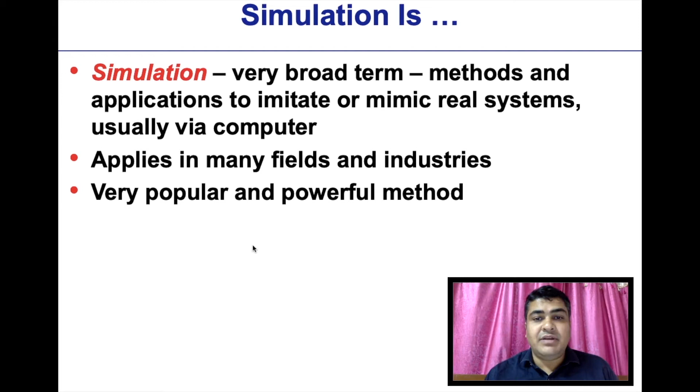So let's go ahead. Simulation - what is simulation? Simulation is basically imitating or mimicking real systems. We see different kinds of systems all around us, and if we want to imitate or mimic them and control them, we need to simulate them in an artificial environment. This is applied in many fields and industries - it's a very popular and powerful method.

What are the different systems we are talking about here? It could be any system - for example, any manufacturing facility, a bank, transportation, medical facilities, computers, freeways, businesses, legal systems, processing plants, restaurants, markets, theme parks, and emergency response systems. These are just some of the systems listed here to give you an idea of how simulations can be applied in practically every field. You name a system, you can identify it, and it can be simulated.

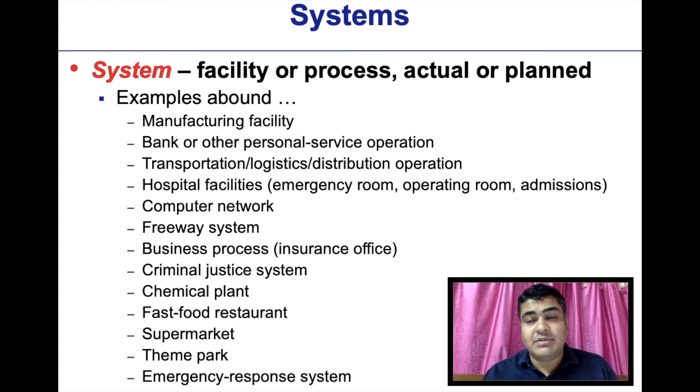So how do we work with the system? Why do we want simulation? Because we want to study the system, measure it, improve it, design new systems based on existing ones, and also control it. Control means we want certain desired set points, desirable outcomes coming from the system, and we want to limit or restrict the undesirable outcomes.

So maybe we are just playing with the actual system, but instead of that, we can have a model or simulation of the system, since often it is impossible to do so in reality with the actual system. It is very difficult to improve and design unless you know exactly what outcome has to come out. For example, if you want to understand how a flooding in a river is going to affect adjoining areas, we cannot wait for an actual flood. We would like to simulate it, understand the system, and then try to take preventive measures.

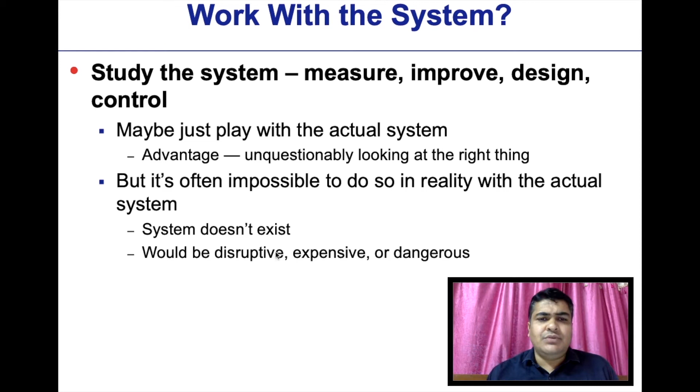So we have to make a model of the system. What is the model? A model is a set of assumptions and approximations about how the real system is working.

So there is a real system, and based on that real system, we can have a model which describes that system. And then we can study the model and manipulate the model instead of the real system, which is naturally easier, faster, and cheaper to do so, and also safer in many cases.

We can also try different ideas with this. As I said, we can manipulate it, and we can make our mistakes on computer where they don't count, instead of doing it in the real world.

Building the model itself is instructive, and we have so much to learn from, regardless of the results many times. And the validity of those models are also checked - how closely this model mimics or corresponds, or is how good this model is a reflection of the actual system.

And that's why if the model is good, then we get almost the same conclusions, in the broad sense at least, as we would get from a real system.

What are the different kinds of models? We can have physical models, like material handling tabletop models that we see in schools and colleges, and then we have mock-ups. We can also have flight simulators, pretty popular.

Then we can have mathematical models which represent the system mathematically, and then they can be controlled for automation, which will come to the point later on. This is often represented by computer programs or mathematical models, and then we can manipulate these programs to try different things and try to get different results.

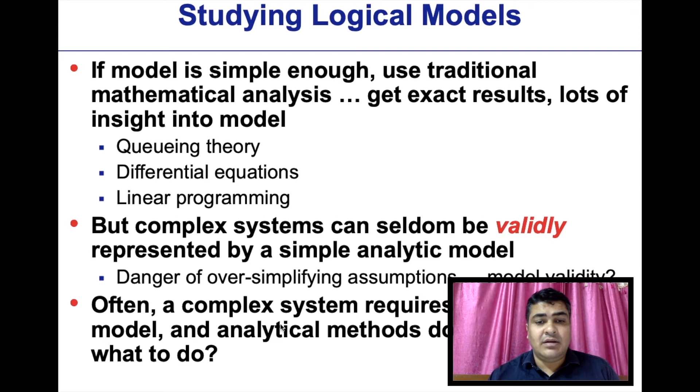So, again, we cannot oversimplify the assumptions to make it simple. It gets simplified to such an extent that it does not represent the actual system anymore. So instead of that, we can have advanced modelings, analytical methods, advanced methods that will reflect the system better.

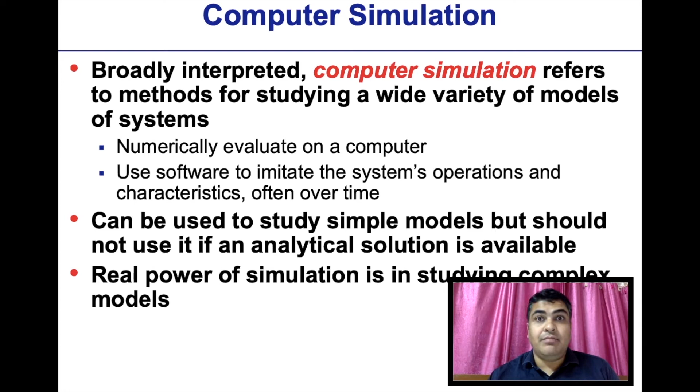So that's why we come to computer-based simulations, for example numerical simulations and softwares which are specifically meant for simulating certain tasks. And then the real power of simulation will be visible when we can study and manipulate complex models for complex systems, which are more realistic.

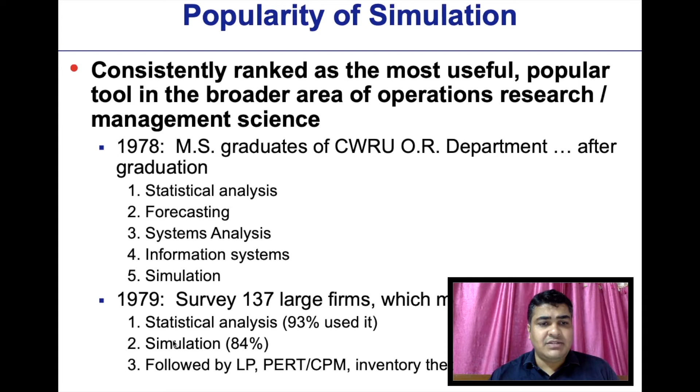Now, this is a brief history of, from 1970s onwards, how simulation became more and more popular. In 1978, in a survey, it was ranked 5, but gradually in 1979, it was ranked 2, and then in 1980, it came up to rank 1 in utility and interest, and then up to '93 all the statistical analysis and the simulation became more and more commonplace, and heavy use of simulation was reported.

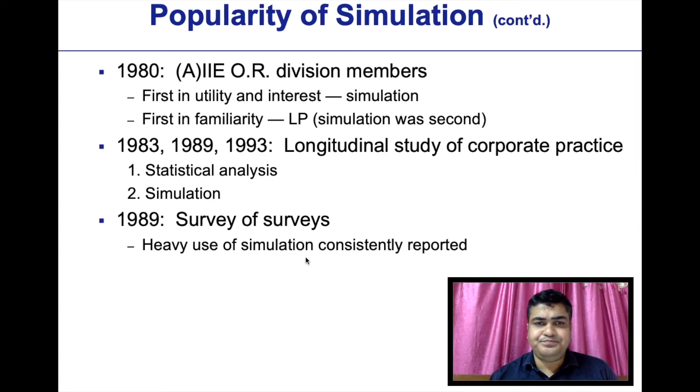A lot of complex systems have uncertainties, a lot of variables, a lot of parameters which are difficult to predict exactly what will happen in different scenarios, and we can't really have a control over the real systems to actually do it. Many times it's not safe also.

But then if we have good models, then we can handle these uncertainties, and we won't have to face this danger of ignoring the system variability. And because of which we'll have better predictions and better response characteristics for different situations.

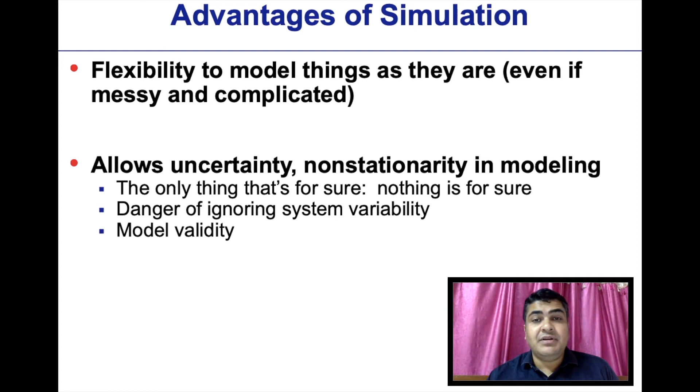For example, in the case of COVID. So the better models they are, the better fitting, the better predictability they have, the better we are suited to handle uncertainties.

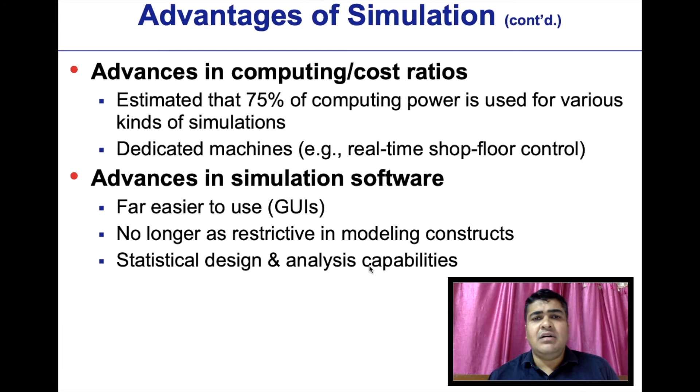Advantages of simulation continued - one more advantage is that gradually over the years the computing power has been increasing as per the cost. So it's estimated that 75% of computing power is used for different types of simulations alone. And then there are dedicated machines and graphical user interfaces which help us have better and better simulations and processing.

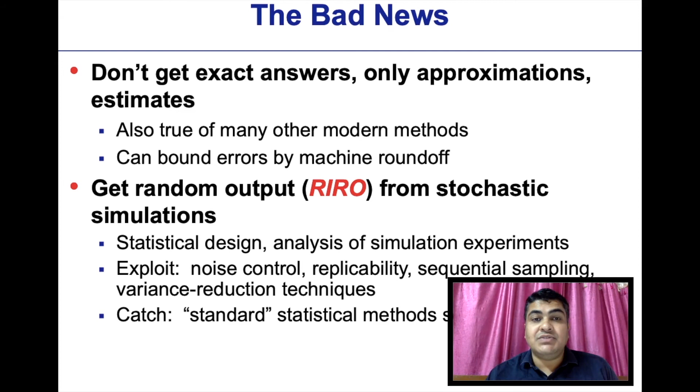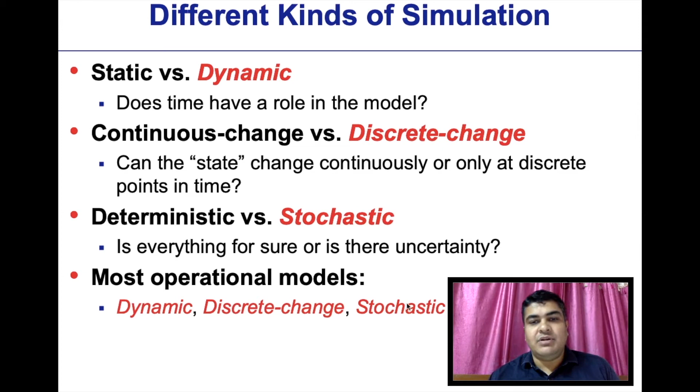Then deterministic versus stochastic, based on uncertainty. Because of uncertainty and rapid change of model system behavior based on time, in a lot of processes these kinds of models, discrete change, stochastic, dynamic, are more preferred.

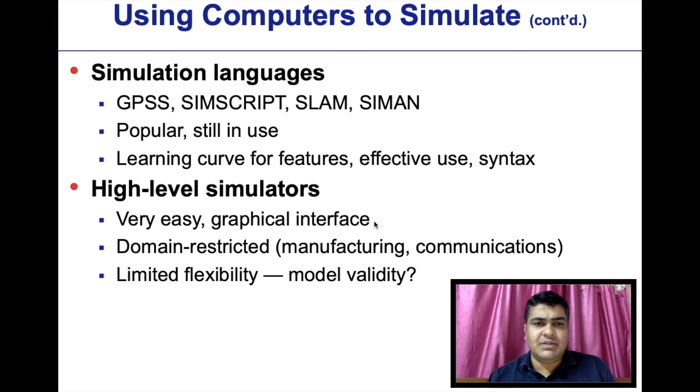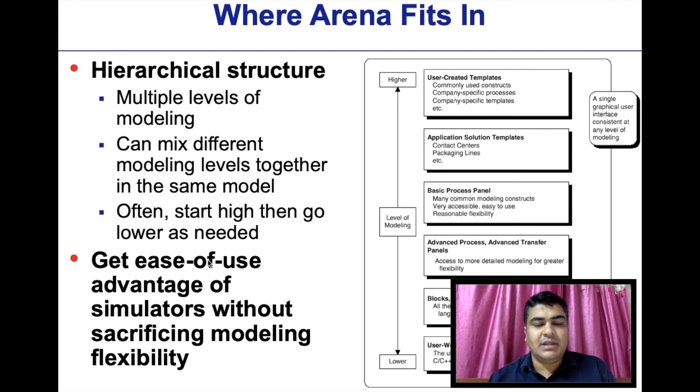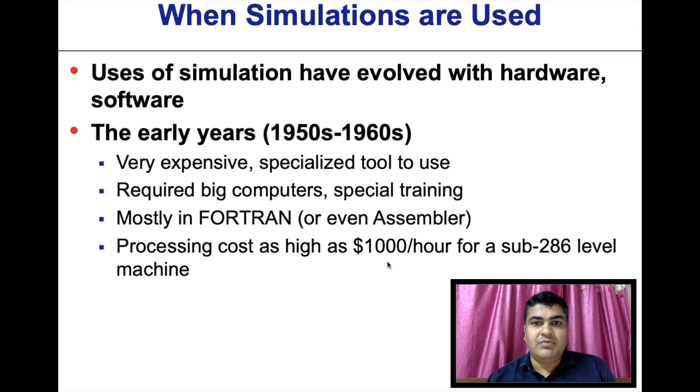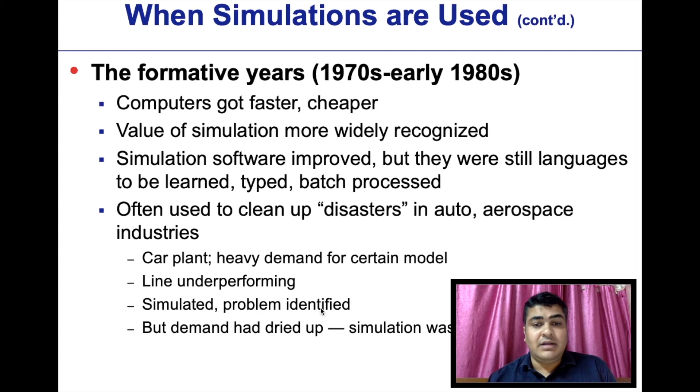In the next decade, it grew even more with better microcomputer power, similar software expanding into GUIs and animation, which became more and more popular. They also cascaded into other areas apart from military and technological, like manufacturing applications, services, healthcare, and other business processes, and different kinds of simulations emerged.

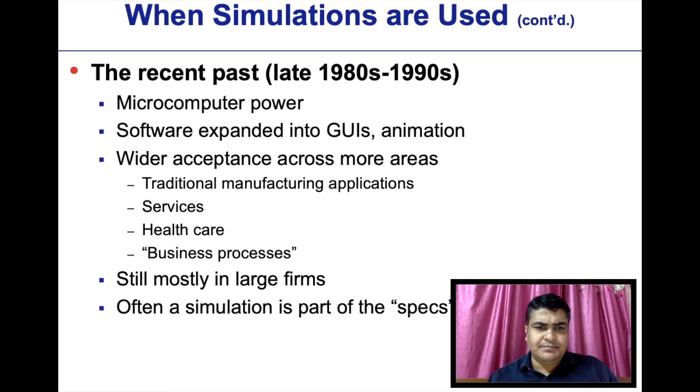So still mostly they were being used in large firms, but at present they have started proliferating into smaller firms and into educational institutions, becoming more and more standard.

Even now, simulations are having features which provide consumers with real-time control characteristics. So the future will bring more and more specialized templates for industries, and automated design analysis. These processes of design analysis are going to be more and more automated.

So that's all about simulations. It was very brief. I hope it was useful to you.

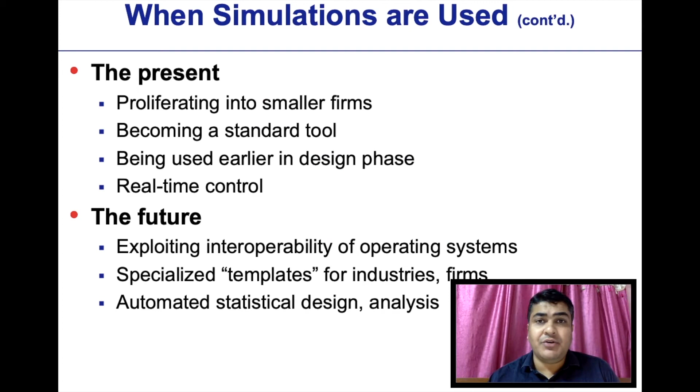Moving on to automation. These slides are by David O'Sullivan. This is his website.

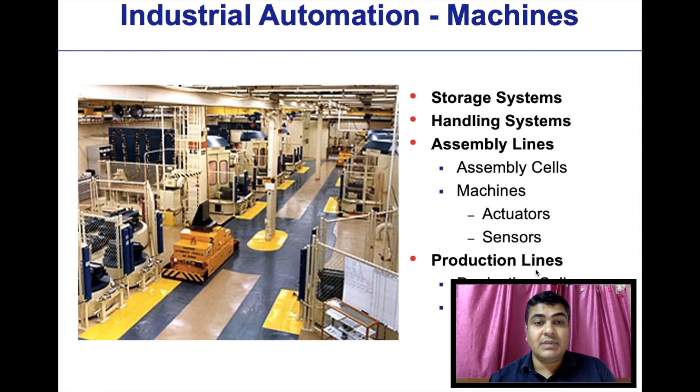www.owl.ie. Industrial automation basically deals with automating everything in manufacturing, whether it be storage systems, handling systems, assembly lines, or production lines. This automation is accomplished using computers, controllers, and software. Controllers are also coupled with actuators and sensors.

Basically it's like a feedback control loop system, and there are different types of control loop architectures in which we want a desired output and we manipulate the inputs to get or maintain that output. The outputs are continuously monitored by different types of sensors, and based on the desired set point, the error is calculated between actual functioning and desired functioning. Based on that error computation, the controller decides, using pre-programmed logic, and takes an action, giving a signal to actuators, like piston cylinders or motors, which in turn affect the process to bring it back to the desired output.

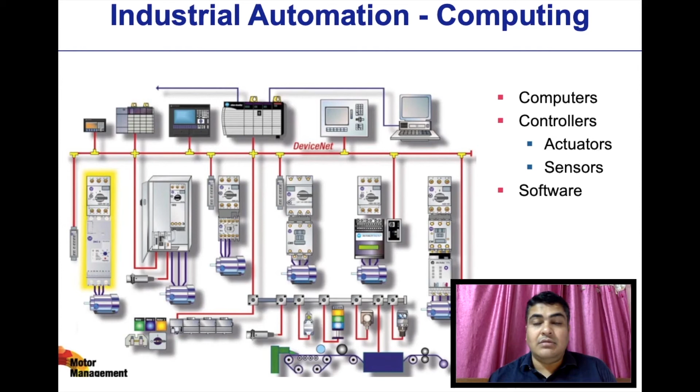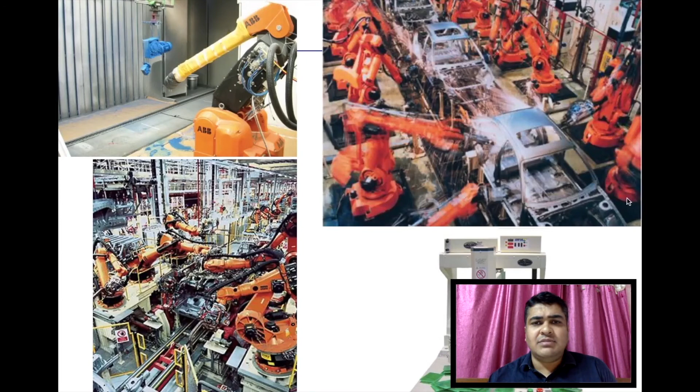So look at this picture, friends, how it looks like, a very, very complex control system. And then similar systems and automation in robotics in different industries, like this assembly line or welding line.

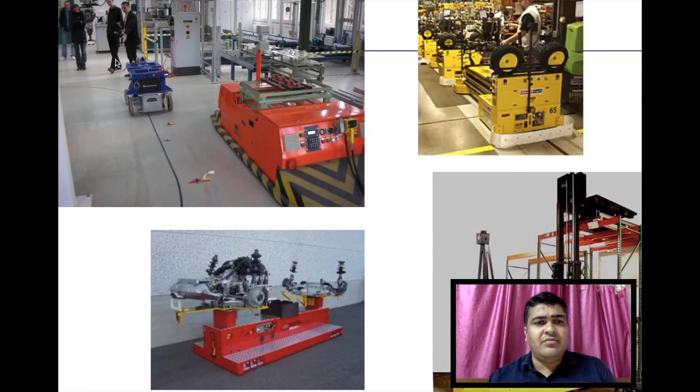Then we have automated guided vehicles, material handling equipment, and automation in manufacturing different machinery and so on.

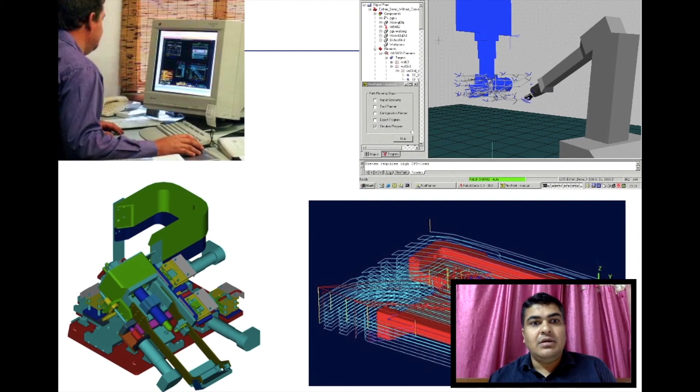So these are the softwares used for design and analysis, also a part of automation. So automation is a big group. So how did this all start? Why automation? Because see, the realities of the modern manufacturing include globalization, international and national, local outsourcing. So because of the products being outsourced and the products circling through different countries to get assembled based on the economies of scale, automation became more and more meaningful to implement.

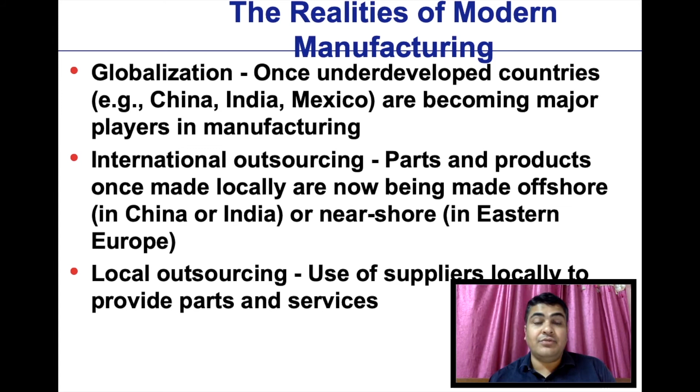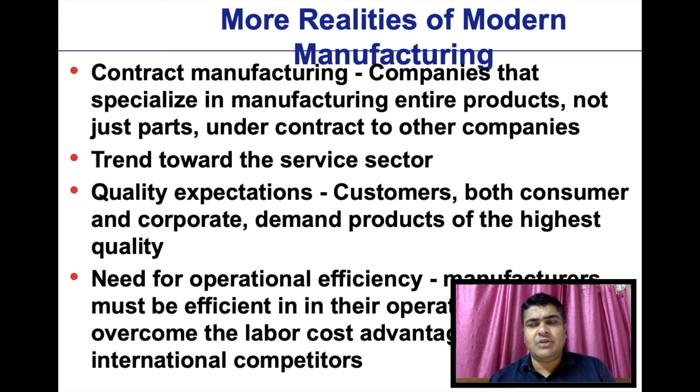Then there is contract manufacturing. There is an increasing trend towards service and quality expectations increasing and increasing competition. Therefore, there is a need to improve the operational efficiency, and that's why automation is justifiable. After this brief introduction of the automation, let us go into how automation is actually implemented in different systems.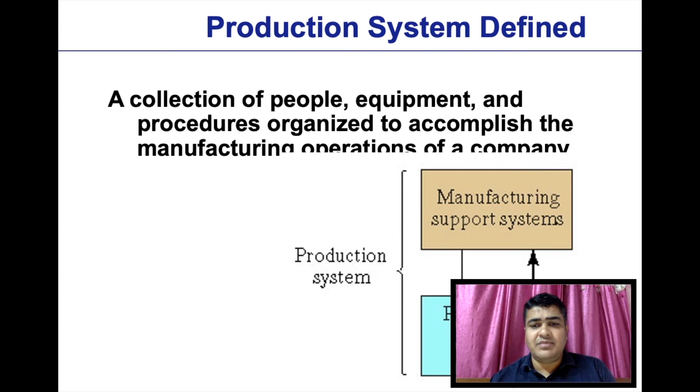So a production system, talking about industrial automation in specific, production system is made up of support systems and the facilities. Facilities means your factory equipment and the layout. And the support systems means everything to support that manufacturing. For example, design, analysis, manufacturing planning, capacity planning, production planning, and manufacturing control, inventory control, quality control, and the like. All these support functions are grouped around the system facilities to enable maximum productivity and efficiency.

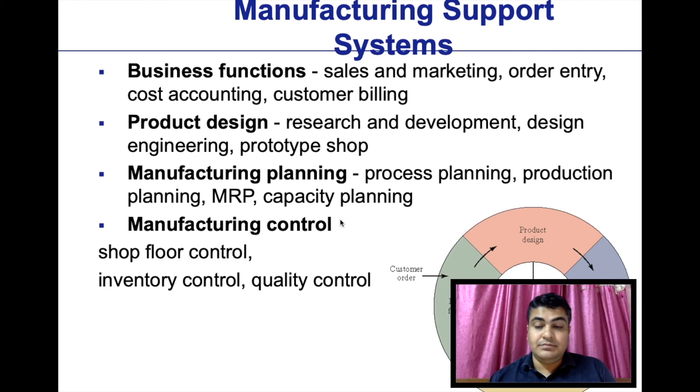Now, automation enters both of these areas. It enters the factory and equipment by having automated machines, and it also enters all these business design, planning, and control functions. So we have computer-aided design, we have computer-aided manufacturing, we have computer-aided process planning and control, and so on. And when we integrate them together, it's called computer integrated manufacturing with proper information flow.

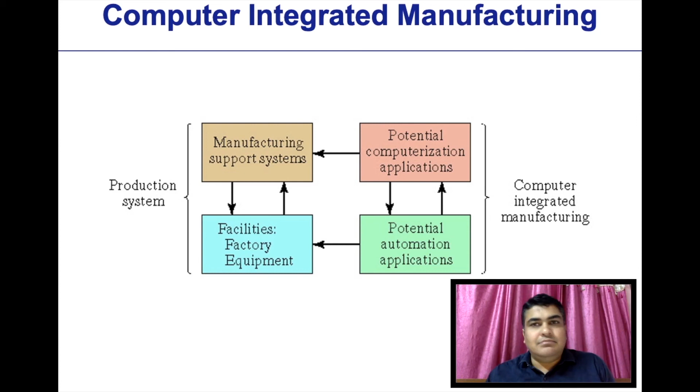And the next stage in Industry 4.0, I'm not going to explain today. It is also integrated with communication technologies and technologies like cloud computing and all. But more on that later, sometime later, not today. So let's talk about automated systems in our facilities. Okay, so these facilities, the different facilities, how the automation enters there.

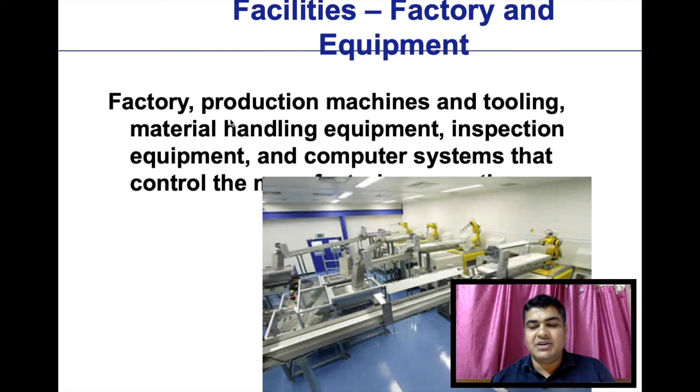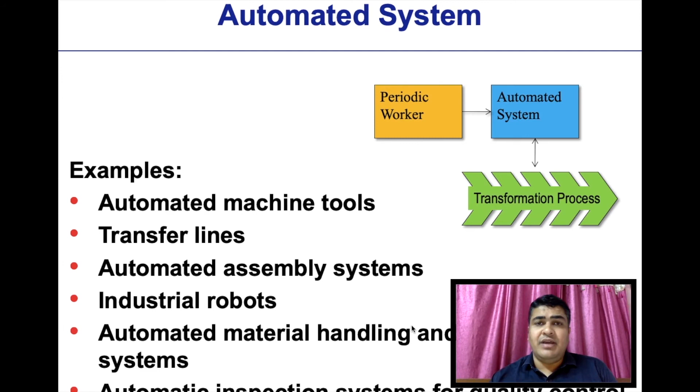These are the examples. So automated machine tools, then transfer lines, assembly systems, industrial robots, which are replacing the human hands, robotic arms, and automated material handling and storage systems, and inspection. So we have machining, we have storage, we have handling, we have inspection. Everywhere automation has entered.

So fixed automation means suited to high production quantities, high initial investment, because that investment is for custom engineered equipment for a particular product that I'm going to manufacture in very large quantities, very high production rates, thousands of them, but it is relatively inflexible in accommodating a variety, because it is not meant to. It is meant to produce at high rates, high volume production of a product which has a good demand, sustainable demand, lot of demand, and therefore this initial investment is high, but it is recovered quite quickly.

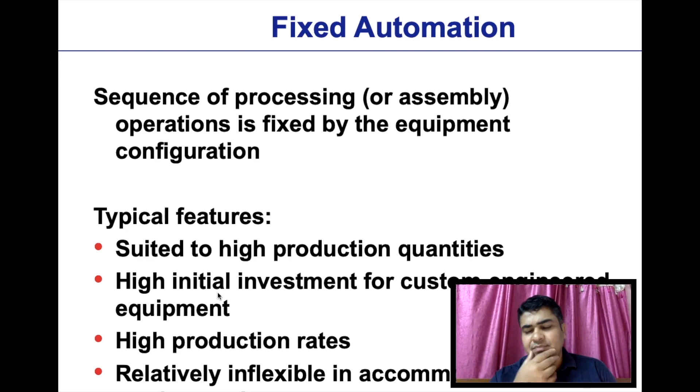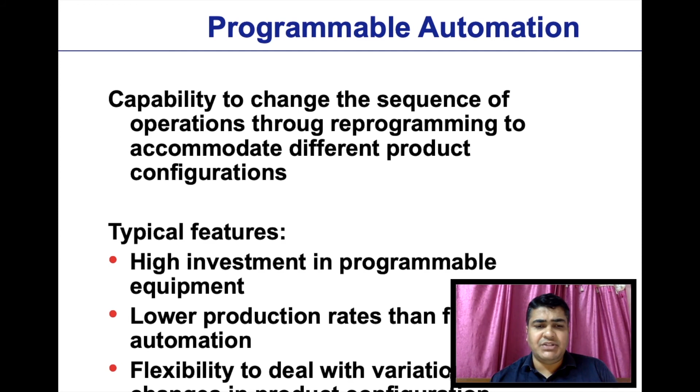In case of programmable automation, and this is at the other end of the spectrum, very low quantity but very high variety. In that case, what is justified is very high investment in programmable equipment, because it has to be very flexible to cater to very different products, but the production rates are very low, and it is highly flexible to deal with variations. Somewhere in between these two is the flexible automation.

Of course, here also high investment is there for custom engineering, but then this kind of automation is very suited for producing parts having very few variations in their design characteristics. So if we have parts having little design variations here and there, we call them variants, then this kind of flexible automation is the best suitable for us.

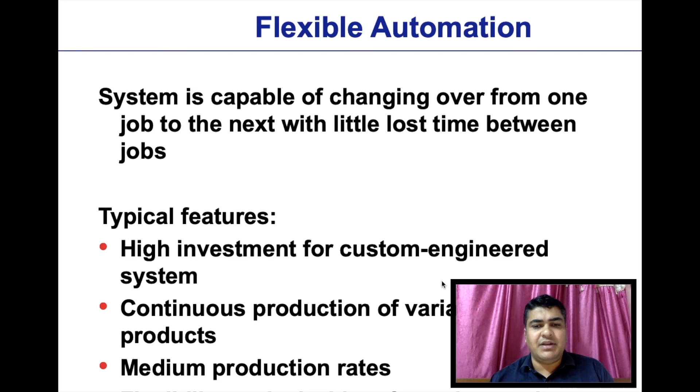Then the reasons for automating. What are the different reasons that we need to automate for? Of course, we can also talk about reasons for not automating, but today we'll talk about why to automate. So yes, I need to increase my labor productivity because I want to be more efficient, and per labor output can be improved by automating machines. This way, the cost will also come down, and I can also balance the effects of labor shortages by having automation in the right amount.

We can also reduce and remove routine, manual, and clerical tasks. So all the routine, manual, and clerical tasks, including the physical tasks, are all going to be automated first. The fifth point is very nice: worker safety. This should be far above.

So worker safety means that by automating, we can ensure a much higher degree of safety for the workers in the industries. As we know, in the first industrial revolution, things were not very safe for the workers, but now the factories are much safer thanks to automation.

And similarly, we can have product quality improvement, but also I will say here consistent product quality, reducing lead times, accomplishing what cannot be done manually, of course, complex tasks. And the last point, which is not visible over here, is to avoid the high cost of not automating. This slide is basically based on the book by Mr. Groover on, I think, computer integrated manufacturing and flexible manufacturing systems.

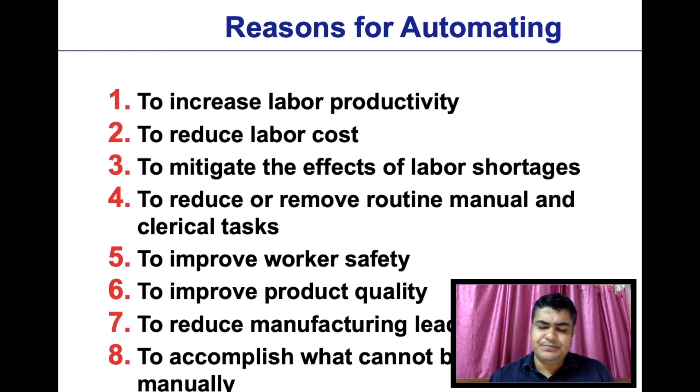So the high cost of not automating, how can we avoid that? Because if my competitor is automating and he's able to produce and sell goods much cheaper, then in order to survive, it will get very costly for me if I don't automate fast. To avoid that, I should automate. How to automate? Now, the automation principle is basically based on three fundamentals.

One of the principles: understand the process, simplify it, and then automate it. We don't just jump to the automation step. We have to first understand the existing process. Otherwise, we'll automate it, and then the automated solution will be far more complex for the end user than it was before. It should simplify the process and make life easy for the end customers rather than making it more difficult, as happens in some cases.

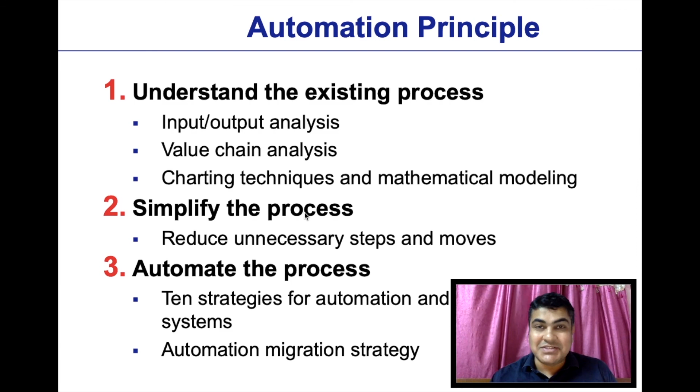And then what strategies can I involve in my manufacturing? I can make my operations more specialized. I can combine different operations into one setup in one station. I can have simultaneous operations going on at one station. I can have different stations integrated together by automated material handling, more flexibility. I can have improved material handling by automated guided vehicles or automated storage and retrieval systems.

I can have online inspection so that I don't have to inspect when the whole thing is done and the batch is rejected. I can start inspecting while it is being manufactured or assembled. And optimization, control, and integrated manufacturing. These are all the automation strategies.

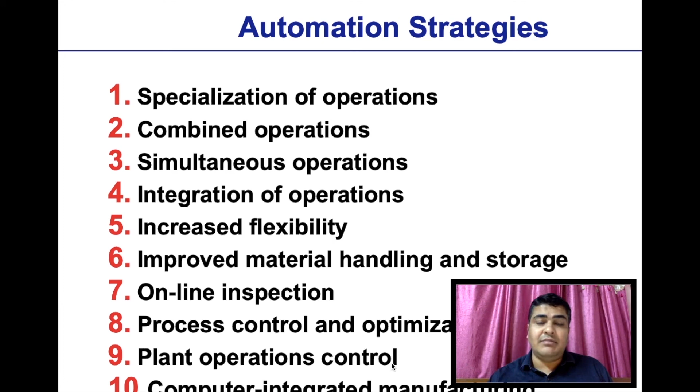Okay, so this is one migration strategy I'll briefly go over. Look at this y and x axis over here. When the product demand is quite low, it is prudent to start with manual production. When the product demand is low, should I immediately go and automate? No, hold on. We should start with manual production.

And this phase one block over here shows that there are manual workstations and manual material handling. So there are workers working on machines. It's not completely automated, and there are workers engaged in transferring the units between the two workstations. This figure is also from the same book by Groover. You can refer to it.

Now, in the next stage, when the product demand increases, this becomes the case for more automation, the beginning of automation. In phase one, there was no automation at all. In phase two, we increased the automation by having these workstations automated completely with hardly any worker involvement. The only worker involvement that remains is in material handling between these automated stations.

In the next stage, phase three, when the product demand increases even more, total complete automation becomes highly justifiable, where we have automated machines connected by automated transfer lines. This is how we can gradually migrate towards automation, especially in developing countries.

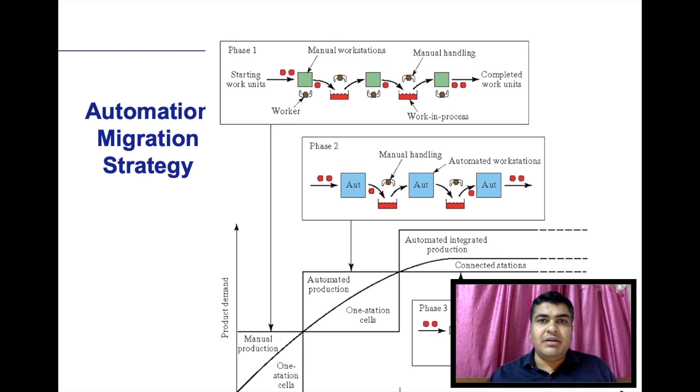Now, what are the different automation elements? What are the different technologies and systems? We have control systems. We should also know about sensors and actuators, machine tools, robotics, programmable logic controllers, material handling and storage systems, identification systems like machine vision, and also barcode and identification technologies.

Then grouping of different manufacturing cells and group technology, flexible manufacturing systems, and also layout of the different assembly lines and how to automate and have maximum operational efficiency.

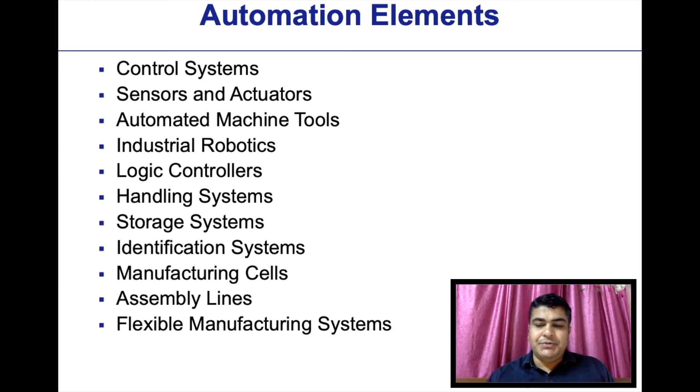And the automation story doesn't end here, folks. This goes on to Industry 4.0, the next advanced topic that everyone is talking about, smart manufacturing and smart factories. That's it for today.